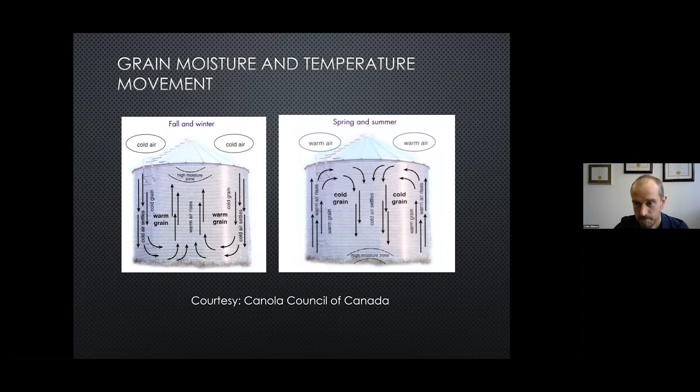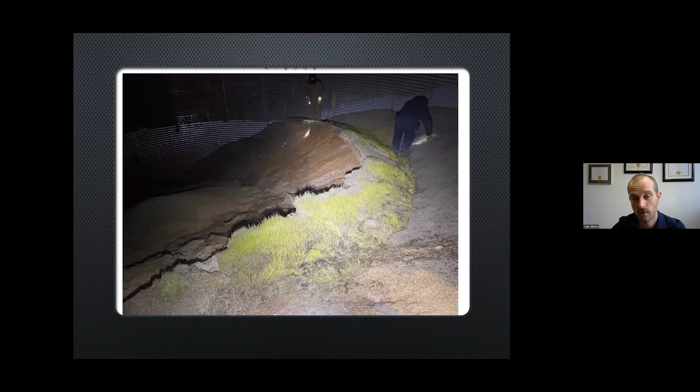The problem is that spoilage often starts in the core of the bin, not on the surface or the edge. So the earliest method for that is grain probes, where you essentially hammer in a big stick as deep as you can into the grain bin. Then there's a mechanism to open up a bunch of small chambers at different depths, and you pull it back out and look at the grain to see if anything's going on - if it's hot, test its moisture content, that kind of thing.

There's obvious problems - these don't scale very well. The largest grain bins are now 130 feet in diameter, so you just can't monitor that grain very well with probes. They don't scale, and they're very manual.

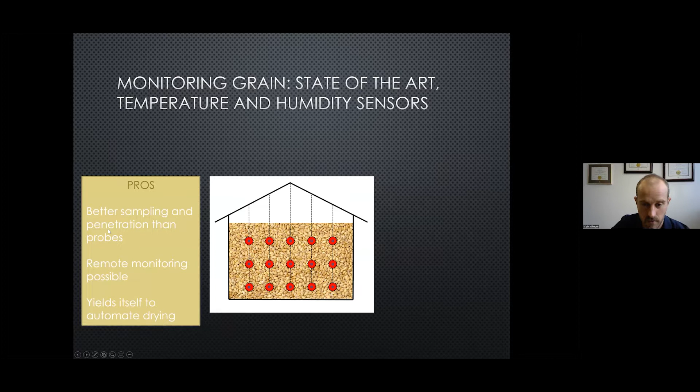But before grain bin imaging, this is kind of the current state of the art: you hang cables from the roof of the bin, and these cables have temperature, and sometimes temperature and humidity, sensors on them - little point sensors that just sense the local temperature like a thermometer would, or humidity like you would for the weather. These are much better than probe sampling or looking at the top, because you're actually getting into the grain pile where the problems do happen.

These are electronic, so everybody who sells these bins has a website so you can get the data off it. You can read it locally with a handheld device, or check it out on a website as well. You can also control your drying process a little better. Most bins, and all large bins, have fans that can push air through the grain, because otherwise you can't control the moisture content and temperature very well.

The problem with these current state-of-the-art sensors is that the temperature and humidity sensors are very local. Grain is an excellent thermal and humidity insulator, so you can have a problem. One of the salespeople I've worked with for many years said he was once in charge of a bin that literally lit on fire. There was a temperature sensor 4 feet away, and it wouldn't detect the fire because the insulation of that 4 feet of grain was good enough to make it read fine, but he could see smoke coming out of his bin. So that's the biggest problem, they're hyper local. Even though it's better than a probe or looking at the top of the bin, there are still large amounts of grain that just aren't monitored.

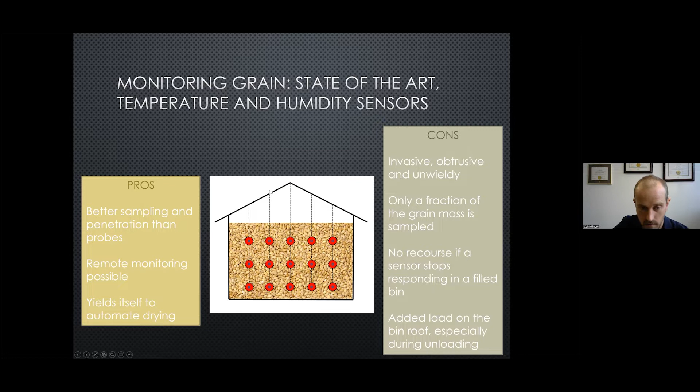Another large problem is that these cables hanging from the roof, when the grain empties, put immense forces on those cables, especially in larger bins. The grain bin companies we work with tell us that the majority of the steel in the roof of a grain bin is actually there to support these cables, not to support the roof and the snow load in the wintertime.

So the technology I'm going over today is electromagnetic imaging, or electromagnetic inversion. That's what the lab I work at at the University of Manitoba does. We have an antenna array, usually something like 24 antennas, in the grain bin. Each antenna transmits and receives in turn at a bunch of different frequencies, and we pick those frequencies, that's part of the art.

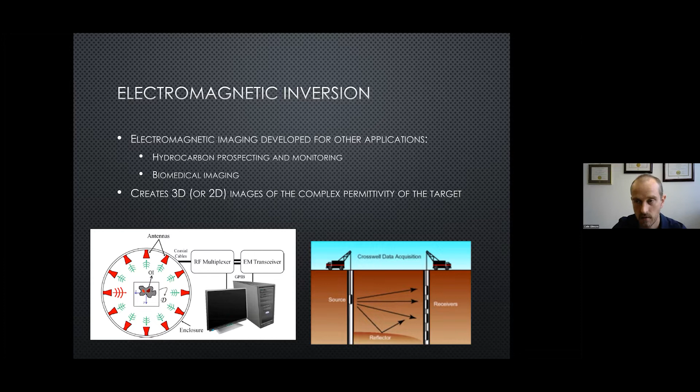You use the information of the scattered fields from some object you want to image, and you create an image of the electrical properties, which is the complex permittivity of that object. Many of the algorithms and processes we use were originally developed in the oil field industry. In the oil field, you're regularly trying to see things deep underground where something like X-ray imaging or traditional medical imaging technologies just won't cut it, they don't get enough signal through from your transmitters to your receivers. So you change the frequency of your electromagnetic radiation to get more signal through, and then you need a special kind of algorithm to make an image of what caused that scattering. That's what we do here in the electromagnetic imaging lab.

The key connection for doing this in a grain bin was provided by Dr. Paliwal at the Grain Storage Research Lab: for nearly a century, complex permittivity is how grain moisture content has been measured at a grain elevator or on a farm. Every farmer has a grain moisture meter, and every elevator has a well-calibrated grain moisture meter that they use to test the moisture content of the grain, because it's one of the factors in the price. So that's been going on electromagnetically for more than 100 years.

That parameter, the complex electric permittivity, for those of you who aren't electrical engineers or familiar with the term, or a geoscientist who's used complex permittivity before: the complex permittivity can be split into two parts. One is just the basic permittivity, which is related to the speed of light in the material, and the conductivity is just the loss of energy in the material. The example I always use: you have a paddle, you stick it into a clear body of water, if the paddle looks bent, that's because the speed of light changes from air to water. But if you stick that paddle into the Red River or the Assiniboine River, you're not going to see it, because the muddy water is absorbing the sunlight and turning it into heat inside that water, so you can't see it.

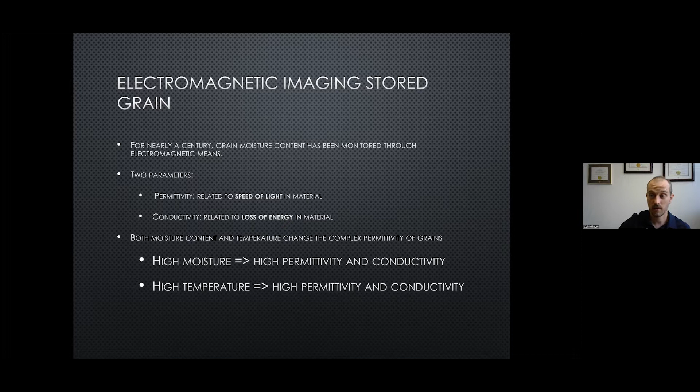What allows us to use this imaging technology to monitor grain is that we're lucky, it turns out that both high moisture and high temperature lead to high permittivity and high conductivity, and they both push the same way. Bad storage conditions are high moisture and high temperature. High moisture and high temperature cause the grain to sprout, which causes more moisture and temperature to rise, and there's that positive feedback cycle I talked about. Both of those push in the same direction. It would have been really bad for us if they pushed in opposite directions.

As the temperature went up, the permittivity went down, and as the moisture went up, the permittivity went up, that would have been very bad. We're fortunate that they push in the same direction. So the key thing is bad storage conditions and spoiling grain both cause high permittivity and conductivity. That's the key that allows this to work.

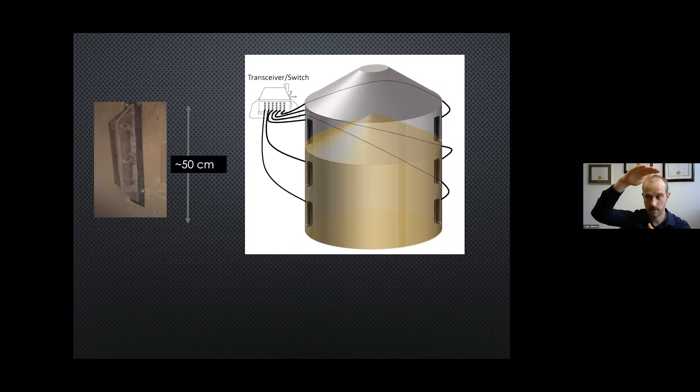Here is a schematic of what an imaging system looks like inside of a grain bin. On the left is a photograph of one of the antennas we use, mounted to the wall—some bolted, some magneted. We've tried different mounting methods depending on economic demand. The antennas are about towel rack size, roughly 50 centimeters tall, and stick out about 10 or 15 centimeters into the bin.

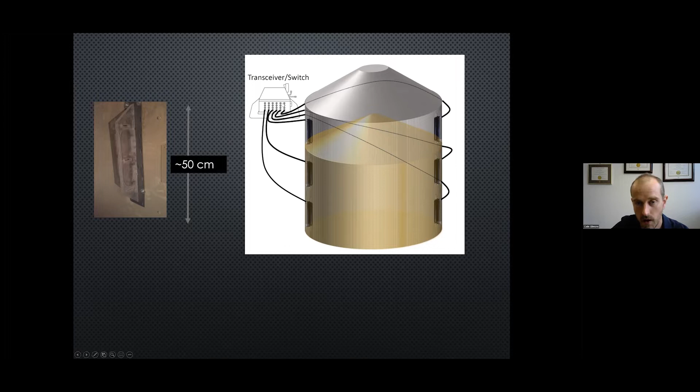Each antenna has to be cabled with an RF cable, similar to a cable TV coaxial cable, connecting each antenna to a switch with control software and a computer in the box—I'll show a picture of that shortly. That does the communications and has the RF radio that does the RF measurements to transmit from each antenna and receive from all of the other ones, and the RF switch to do all of that.

Here's a photograph of one of the early installs we did. This bin is about 30 feet, or 10 meters in diameter, roughly 33 feet. In this install, the goal we always have is to spread the antennas around the outside wall of the bin as much as possible. You don't want a dead zone—it's much better to get data from all possible angles, so we try to spread them out as best we can.

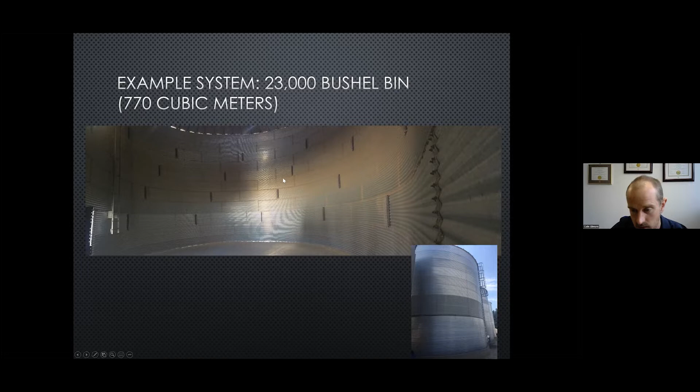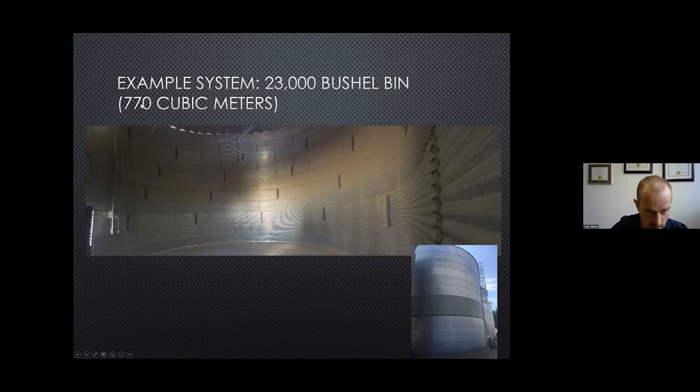This system was bolted, so you don't see the cabling on the inside of these antennas. All of the cabling comes on the outside of the bin and runs back to our transceiver system, which is stored bolted to the outside of the bin. Just to give an example of size, this bin is 10 meters in diameter and about 770 cubic meters in volume.

The power supply is kept in a separate enclosure that can be quite far away. There's multiple reasons for that, but one is just RF noise—you want to keep it away from large industrial fans and other equipment on a farm, since the power supply can be very noisy electromagnetically. So we keep it far away. This power supply box also has relays to turn fans on and off, so that a producer or farmer can sit at a computer and turn the fans on for all of their bins remotely over the network connection.

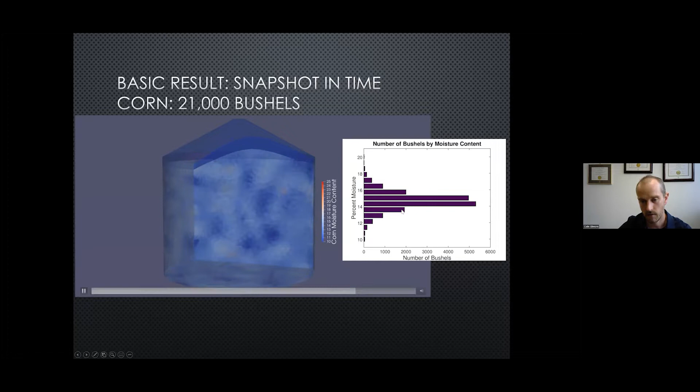Here's the basic result the system provides. We have a computer model of the bin—I'm showing a video of a 3D image, and these are slices of that 3D image. We can provide things like a histogram of the number of bushels by moisture content. This was a bin full of corn, and this is the estimate of the moisture content of each bushel inside. That's useful because grain is bought and sold by weight, and you have to keep moisture content low for safe storage, but as high as possible since you're getting paid for that weight. If you've got 15% moisture grain, you get more money than 13% grain, because you made 2% more by weight. So it's worth a lot of money to carefully control your moisture content, especially in a large bin.

Now, one of the biggest sales points for this system is that we can detect spoilage. The problem is that no industrial producer will ever let us spoil a bin of grain, for obvious reasons. So we've built many scaled systems where we can go in and spoil grain or add water and monitor what happens. This was one of the earlier ones—it's a barrel, about 240 liters of grain. We welded on a plenum false bottom floor so we could pump air through this barrel.

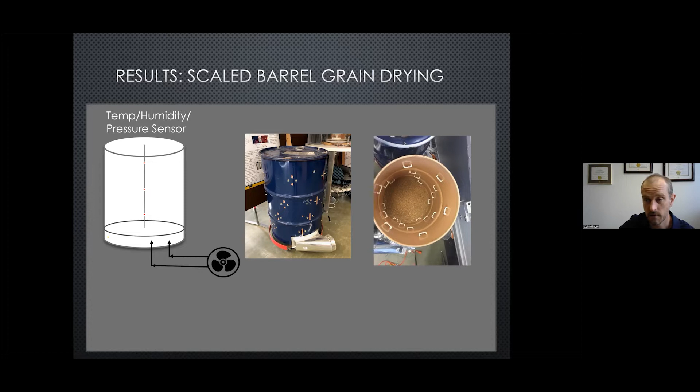To correlate our results, we used a second system: temperature and humidity sensors on this barrel. We made the grain really, really wet, then imaged it to see what would happen over 6 or 7 days as a fan dried it out. Here's a video of that result.

What we have here is the number of days of drying. With this three-dimensional image, we got better results if we averaged it by layer, and it was a much easier thing to understand. You can see as time goes on with this system, the grain slowly becomes more dry.

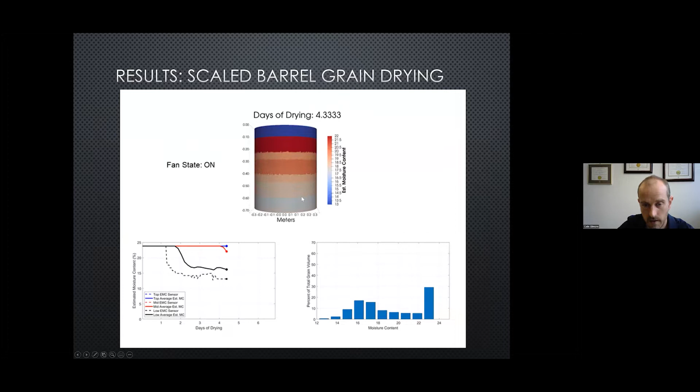It starts out above 22% moisture and ends at 13% moisture. That goes from grain that will spoil in a day or two, down to grain you could store in this bin for months on end without worry.

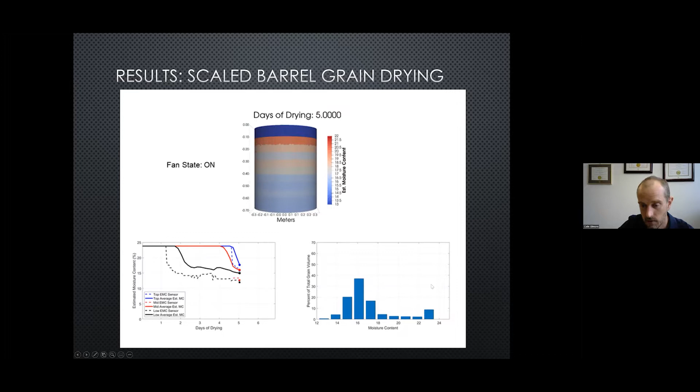We also have plots of how the EMC sensors compared with our imaging — there are differences there, but overall you can see how that works, and you can watch this histogram change over time with the moisture content. It starts out almost all of your grain volume at high moisture content, and by the end it's dry.

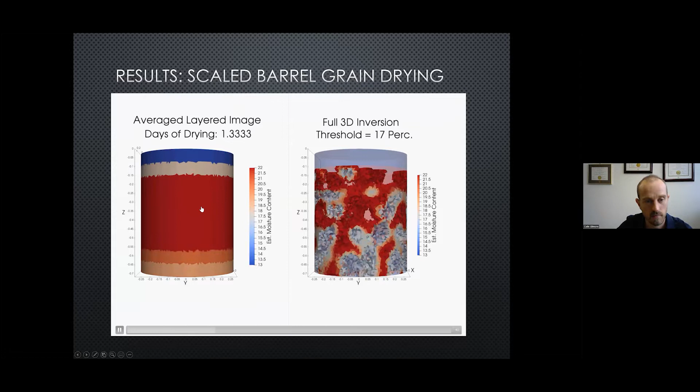Here's another little video showing this is the same image as on top of that last one, just to show that there's truly a three-dimensional image being produced, but we were averaging it by layer, because the three-dimensional image, especially in this test bin from the older times, has a lot of spatial variation in moisture content that's very hard to just look at and interpret.

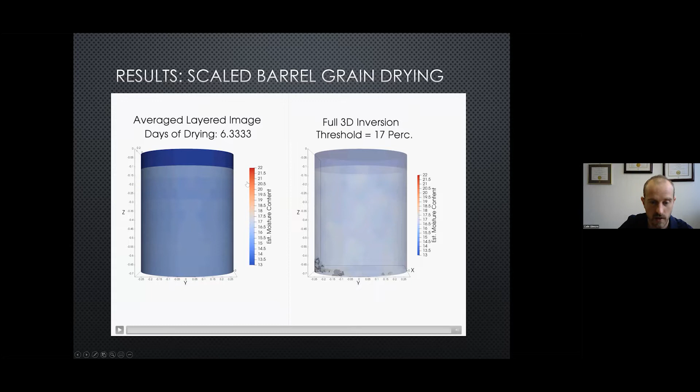So we have a three-dimensional image, but this is just a threshold view of it to show that it does exist and is there. It shows the same kind of result, but it's more interpretable if we just average it by layer.

Inside some larger bins, we were able to bury some hotspots. We couldn't spoil the whole bin or make the whole bin wet — that's very dangerous. So we went into this bin and physically buried bags of really wet grain to test whether we could detect a hotspot if it was indeed there. And of course, we can detect a hotspot.

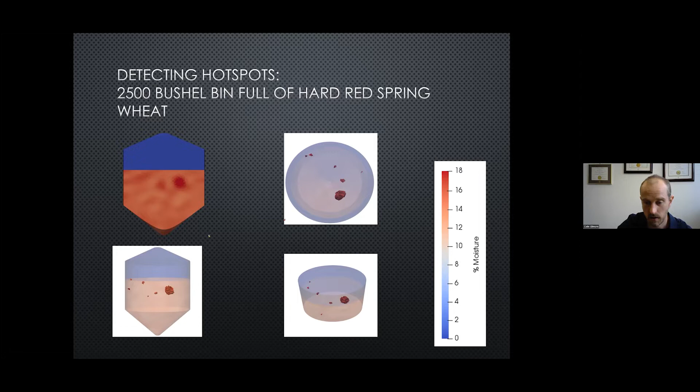So that's just what this one shows. This bin is about 15 feet in diameter.

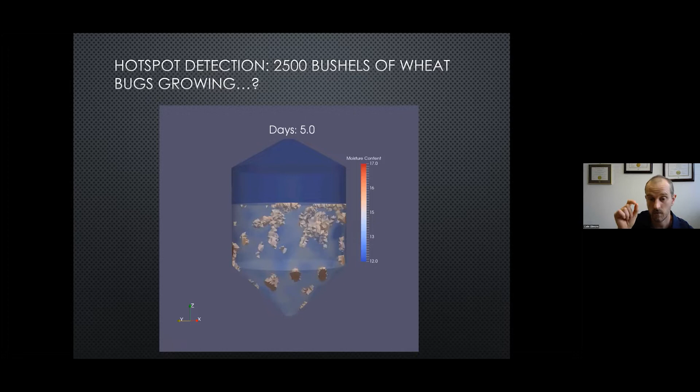Here's another result — once we buried that hotspot, we let the grain sit there for a while. This was in the summer. There was a very bad insect infestation in this bin, and we think that as the days went on in that little video, we were actually detecting the insect activity. But it was kind of an incidental infestation, so we weren't able to sample it in time.

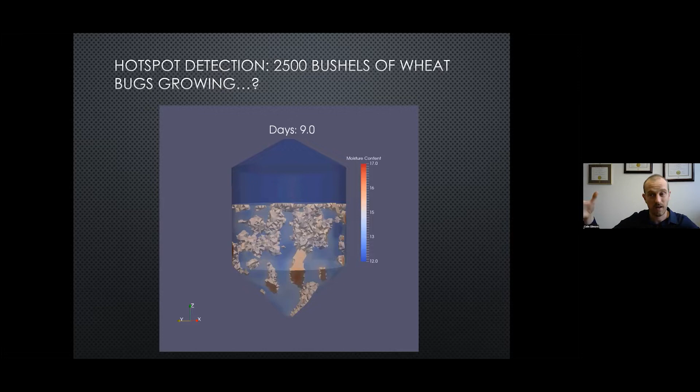We weren't going in there to take samples of the grain with a probe to prove we were detecting insects, but this one turned into a nightmare level of infestation. When we went in on day 9 and opened the lid, it was just a cloud of beetles flying out in your face. It was very ugly — the grain was stuck to the outside bin wall where the bugs had eaten it. It was a very bad infestation.

Some people might be more interested, rather than the actual grain which I've spent a lot of time talking about, in just the architecture of how the RF side and signal processing side works. We have boxes on top of the bins that communicate with each other over a cell phone network, and the inversion algorithm is done on cloud computing.

The inversion algorithm is done on cloud computing rather than locally because it's a very large computation — especially from a farming perspective, this is a very big computational problem. The results get displayed on a website that's constantly being refined and updated, which I can show some examples of in a minute.

Our inversion algorithm is what I specialize in. We have to build a computational model of the bin, which ends up being a mesh made of tetrahedral elements—usually about 200,000 of them. The size of each tetrahedral gets bigger in a bigger bin because you run out of computational resources. You can't simulate a large bin with the same tetrahedral size as a smaller barrel, because the computational problem becomes too large.

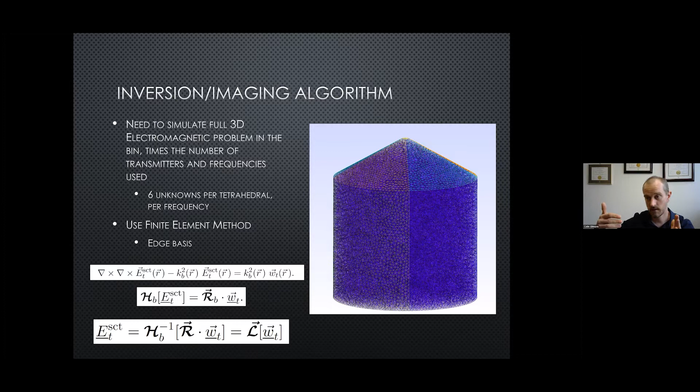I don't want to go into the details of the operator, but basically the core of it is we have a code that says, if you have this grain, tell me what the electromagnetic field should be. That's called a forward solver.

Now the inversion algorithm is the other part. What you need to do is say, well, I have a guess at what the grain is, and I have a measurement. You simulate what the electromagnetic fields at your antenna should be. There's always an error between your measurement and your simulation. Then an optimization algorithm tries to create an image of the permittivity that causes those electromagnetic fields, and you keep optimizing until your measurement and your simulation are close enough. That problem is called the inverse problem, and it's a very complicated set of rules and optimizations on how you do that.

The problem is that it takes a lot of computation because we have 24 antennas, and every antenna is another full three-dimensional electromagnetic simulation that you have to put in an optimization loop. So every time, you're calling your full three-dimensional solver 24 times on this structure. We tend to use Amazon Web Services instances because they were the most economical when we were first developing this—kind of a 36 CPU, 72 gigabyte of RAM processor. It's very expensive to put that dedicated on a producer's site because they don't need it all the time, so it's definitely worthwhile to use cloud computing services.

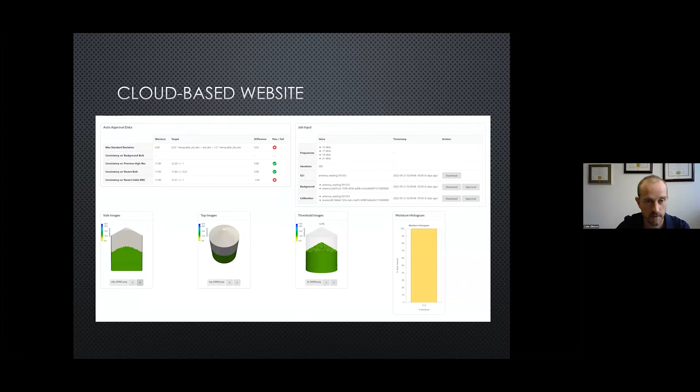So the net result is that we can have this thing in the field and generate a full 3D image of what's going on in the grain bin. It takes about 1 to 2 hours on these machines, and costs ballpark $5 per image in computational cost. The beauty of this architecture is it scales to thousands of bins because you just let Amazon deal with the scaling.

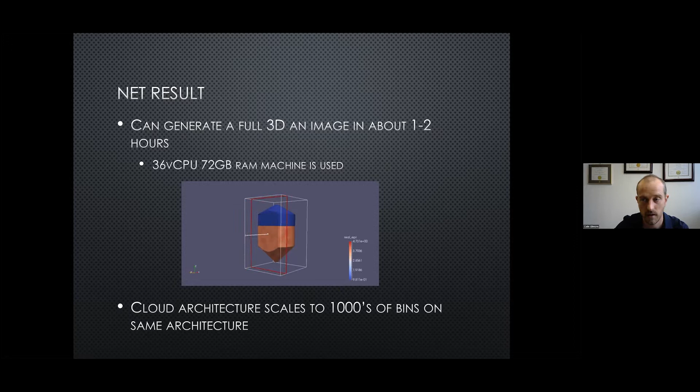Thank you very much. Thank you so much, Colin.

I think everyone's going to agree with me here, that is fascinating—I never knew grain bins could be so interesting. I love the videos you included in that presentation as a visual learner; that was really helpful for me to understand what was going on. And can I just say, I appreciate that we're close to Halloween, but that nightmare level infestation you showed is going to haunt me, Colin.

Were you there for that? Were you actually there when that happened? Yes, yeah, I had to clean the bin out. I had to climb in and scrape all the grain off the bin walls and shovel it away because it's bad when it spoils. So it's your Halloween nightmare then that you're going to relive. Okay, yeah, that was especially the video that accompanied that.

I can only imagine what that was like in real life when you actually went to open that bin up. That is insane. So I have to say this is super interesting, and you definitely can see why you were shortlisted for this award.

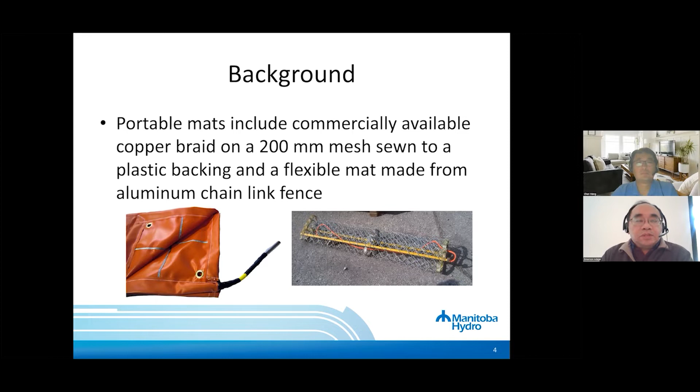Now this one on the right is a utility in-house design. It offers the same protection, but it has a lot of limitations. As you can see, there are two designs for ground mats: one is the fabric design, which is made of vinyl, and the other is non-fabric. The fabric design gives elevation to the foot, thus providing isolation as well as grounding. Now, the non-fabric design is usually made of metallic material, and it allows the foot to contact the surface material within a mesh.

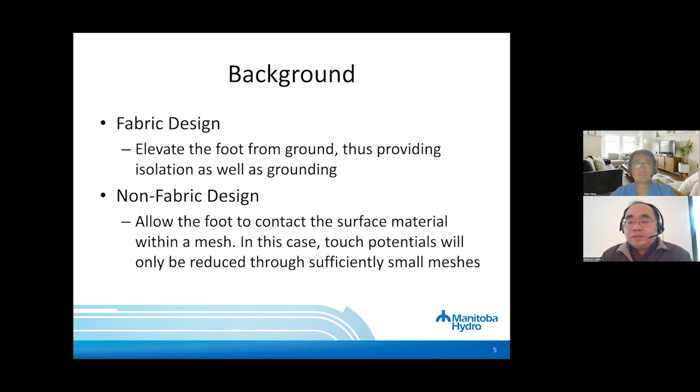Records have shown multiple near misses historically involving electrical workers doing their work, due to hazardous touch and step potentials. Now this has caught the attention of CEATI. So CEATI created an R&D project to address the deficiency and the need to update the test and requirements for portable ground mats in order to better protect our workers. So in order to check the effectiveness, they decided to put in a new test procedure, and also look at if there are new improvements or new materials we could use as gradient control mats.

So before the CEATI GLP 3708, there was already the ASTM F2715 standard. This standard outlines the test procedure for ground mats, but this is only for the fabric design, not including the non-fabric design. And this hasn't been updated since 2009. So there's really a need for updating these standards, and that's where the CEATI GLP Project 3708 came in. With members from other utilities and manufacturers, they formed a group and have come up with a new test method and test procedure.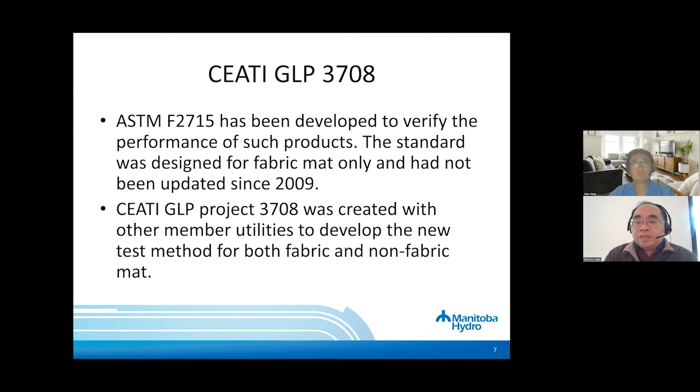Right now, I will turn the presentation to Chen to discuss the tests, the old method and the new test method. Chen, take it away.

Yes, hey thanks Emerson. So as Emerson mentioned, we've had a couple of near miss incidents in the past, not only from our utilities but from other North American utilities as well. So due to this ongoing safety concern, Manitoba Hydro, along with other utility members, initiated this CEATI project to look into this issue and evaluate what kind of new test methods we should develop to evaluate this type of design, in order to update the ASTM standard. So we started evaluating different test methodologies, and because the grounding mat has two streams, one is fabric and one is non-fabric, we designed individual tests to evaluate the different types of product.

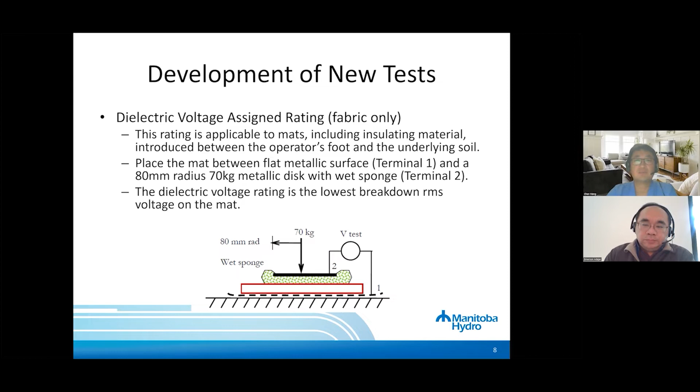So the first new test developed from this research is called a dielectric voltage test. This test is designed to confirm the electrical insulation performance of any non-metallic mat. The test procedure includes placing a flat metallic plate with a wet sponge on the ground mat, representing the worker's foot contacting the mat. Then we apply a voltage, and this voltage is slowly increased until the leakage, until the insulation actually starts to break down. This gave us the minimum breakdown RMS voltage on the dielectric mat. Next page, please.

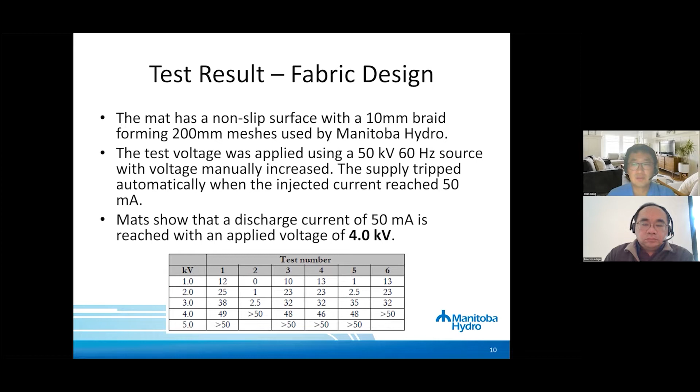But it's worth mentioning that the condition of the mat is very critical for dielectric testing. We found some previously used mats fail at less than 1 kilovolt due to wear, punctured holes, and those kinds of things. So it really depends on what condition the particular mat is in when you test it. Next page, please.

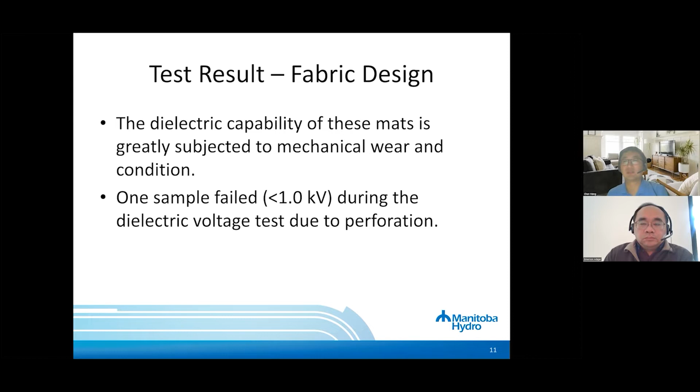So for the metallic mat, we tested one made of aluminum chain link fence with 30 millimeter mesh. The fault current rating is about 12 kiloamps, which is much less than the theoretical value of 23 kiloamps based on calculations. This reduction is mainly due to the weak connection between the copper braid wire and the aluminum mesh. The mesh may be okay, but the connection is already broken and it's arcing, so that's why it failed.

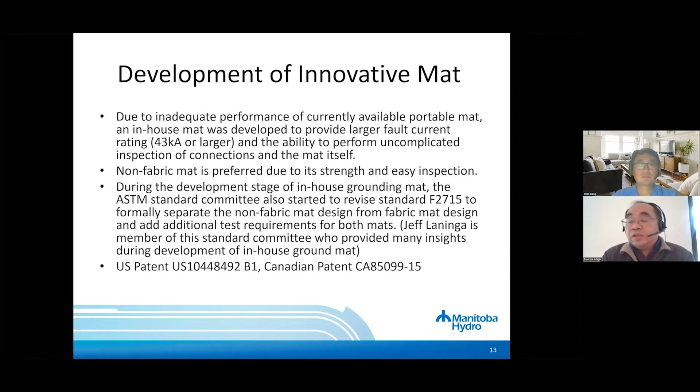So this is the portable ground mat that we designed. Actually, there are already two versions. The first version is the one on the left, and the second version is the one on the right.

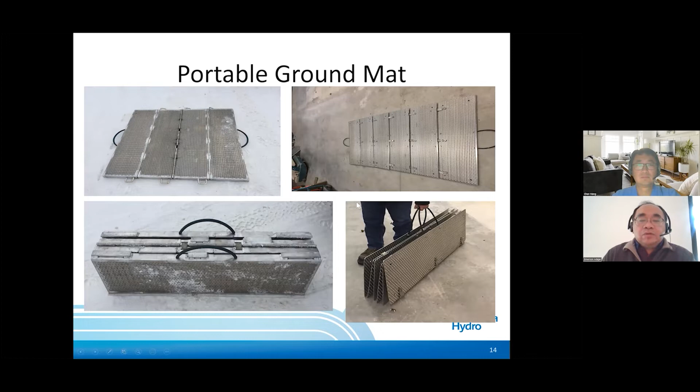The first version is like an attache case, made of aluminum cut into 4x4 or 2x4 pieces and welded into a frame assembly. It's really sturdy and offers a defined working area for our workers. The panels are attached with a hinge running from the bottom to the upper portion, so it will not buckle when workers step on it.

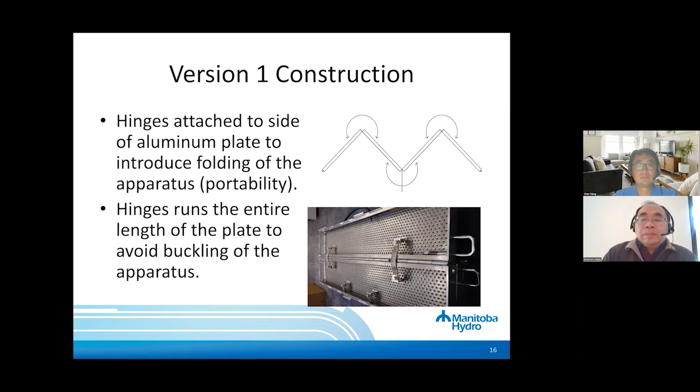As you can see here, this is how the portability comes in, because it can be folded like an attache case or a picnic table. It can be locked with a spring mechanism, and this locking mechanism can be used during working, whether it's spread out or not, so it will hug the ground more. It's made of perforated aluminum in order to limit slips and trip falls.

For the electrical bonding, we use 2 bondings per panel to make sure that all panels are in the same equipotential zone. They're all bolt-connected for easy inspection, so every time a worker starts their work, they can easily inspect it and remedy any loose connections.

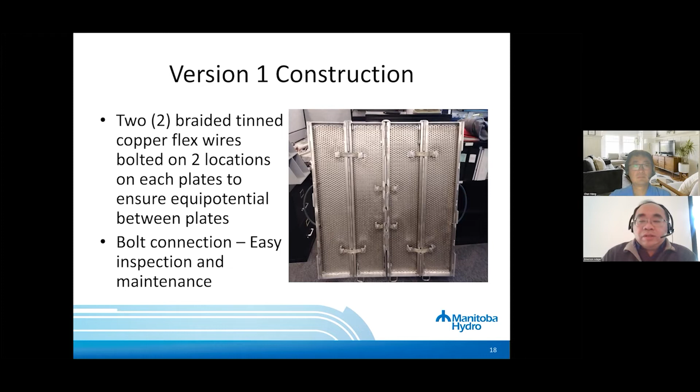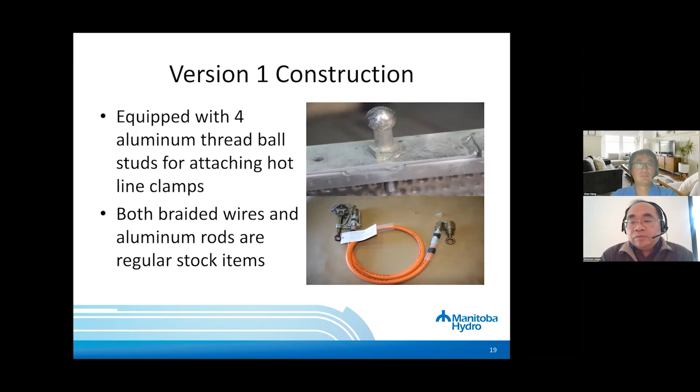To connect the bonding, the ground mats into the equipment, it is equipped with threaded ball studs, and we also use hotline clamps to have attachment or connection from the equipment to the grounding mat.

When we were designing this, we continuously involved our field workers, and with their help we designed version 2 of the grounding mat, which is much wider and a little bit lighter.

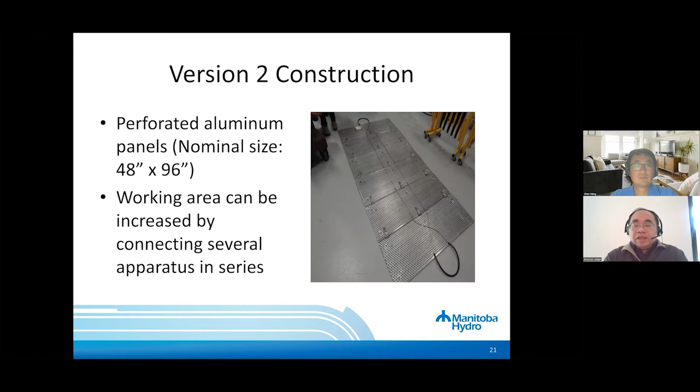This one is also made of perforated aluminum, and it can be extended by attaching panels in series, then folded again like an attache case. The braided wires act not just for bonding but also as a hinge between the two panels.

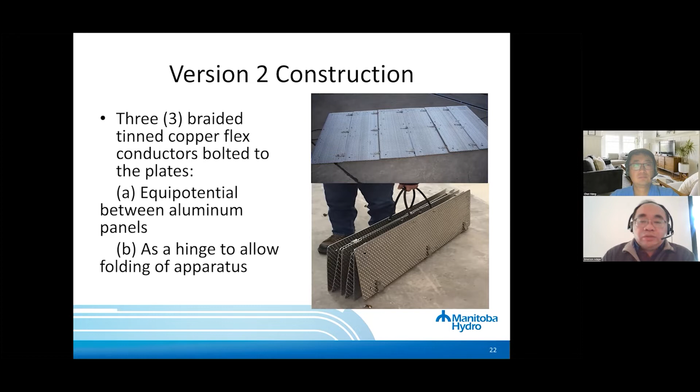It has a locking mechanism to secure it when bringing it to the remote work area, and we put in a steel wire just to be able to carry it. Again, there's a thread ball for attaching a hotline clamp, which is a must.

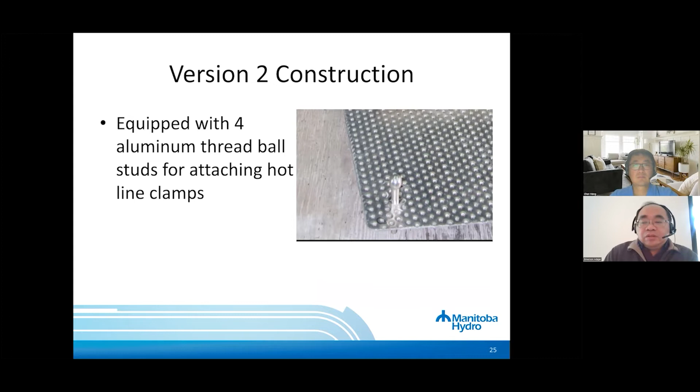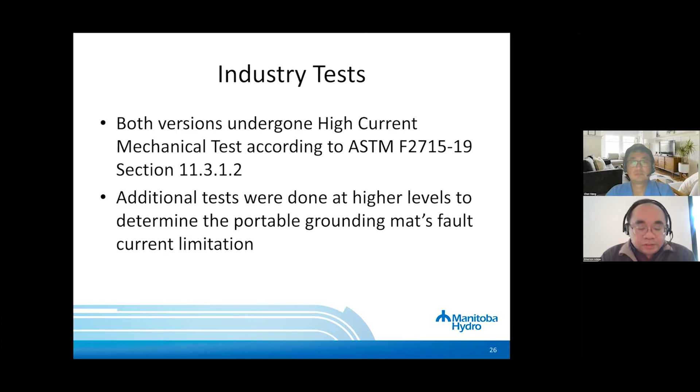Now, since we already have these new standards, ASTM F2715, we have it tested to see if our grounding mat can be safe enough for workers, and then offer them an equipotential safe zone. So the results of the tests will be presented to you by Chen.

Thanks, Emerson. I will talk about the test procedure and test results on our in-house design. The previous test procedure proposed by CRT has been adopted by ASTM standard F2715, and particularly for the metallic one, we adopted the fault current rating test. According to this standard, the minimum rating is 25 kiloamp RMS value under 15 cycles duration, and it has to meet the high asymmetrical peak depending on what kind of X over R ratio is based on your system.

In addition to the standard, we decided we want to test all the way to 43 kiloamp as minimum. The reason behind the 43 kiloamp is matching the rating of the standard fault-rated PPG cable used in our system, so we want to make sure the cable and the mat match each other and make a good pair. We also bumped all the way to 54 kiloamp, which is the max allowable testing current in the high voltage lab, so we reached the limit of the equipment. Both tests will be using an X over R ratio of 30.

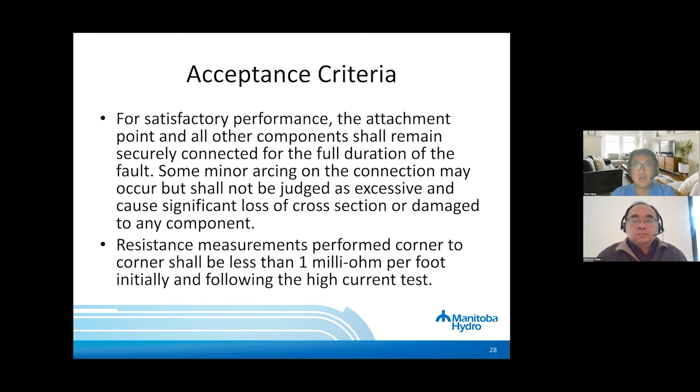The pass-fail criteria is that all the attachment points and any component shall remain securely connected during the test. We allow some minor arcing, but none of it should cause any significant damage on any component or loss of cross section. Resistance measurement shall be taken before and after the test, and it should always be less than 1 milliohm per foot.

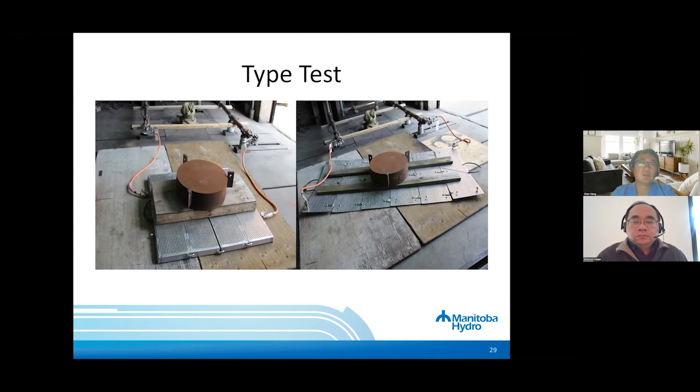This is showing a typical 43 kiloamp test on version 1. We connect between point A and point D. If you can play that.

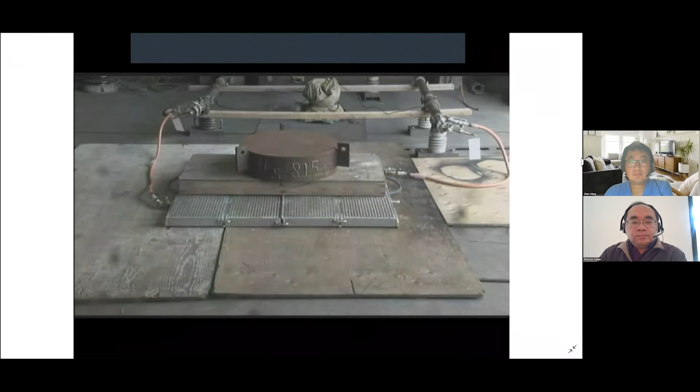As shown in this video, we tested all the way to 43 kiloamp, which is the upper limit of this fault-rated PPG cable. That's why the cable starts smoking, because it's reaching the limit. The cable shows some damage on the outside jacket, but the grounding mat is still intact - there's really no arcing, no smoking. We don't see any damage.

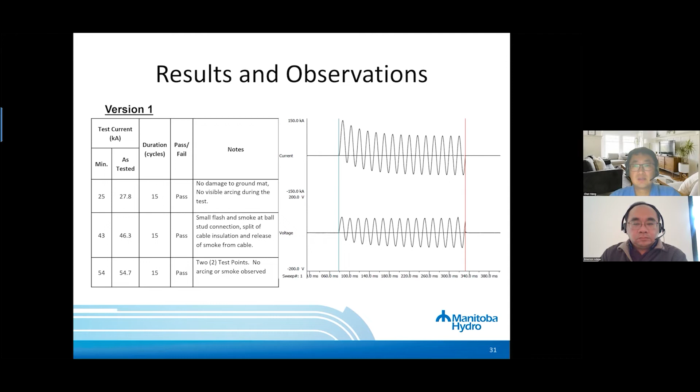This is the test result and observations on grounding mat version 1. We tested 3 currents: one is 25 kiloamp, that's the minimum requirement by the ASTM standard; we tested 43, that's our internal minimum requirement; and then 54, which is the limit of the testing equipment. Version 1 showed very good performance - it passed all 3 tests. There's no damage, minimal arcing we see, and we don't really see any smoking. The right hand side is showing the current profile.

This is showing some after-test observations on version 1 mat. We see some small pitting and small arcing marks between the surface of the grounding stud and the surface of the ground mat, but besides that, we don't really see any noticeable damage. We feel this one can even go higher than 54 kiloamp, but unfortunately we are not able to confirm that because of the limitation of the equipment.

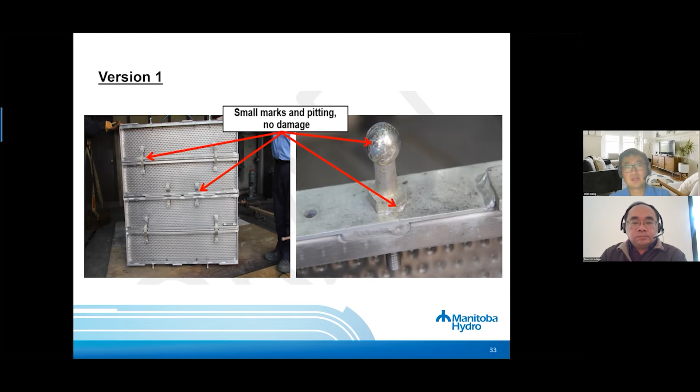That's all for our presentation, and we'll open it up for questions.

Thank you so much, Chen and Emerson, for your presentation. I think your grounding mat is such a great example of how innovation can really benefit everyday work life, especially considering its safety applications, because you're having a very direct impact on electrical workers' safety. This is not something you want to mess around with. So this is really fascinating to see the process you went through, and also all those very thorough tests, and it's amazing to see the results from those.

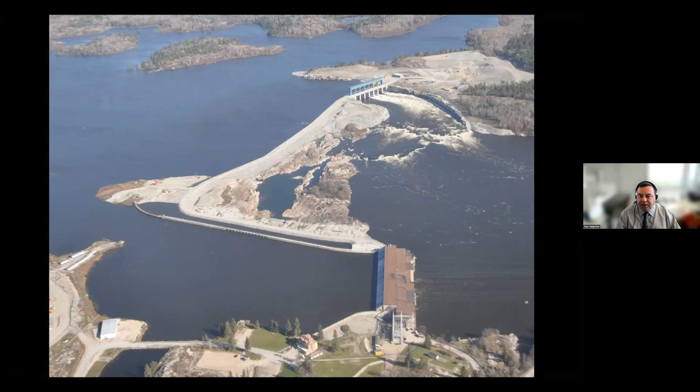Since I'm going to be talking about a unit at Pointe du Bois generating station today, I'll take a few minutes to describe this plant. The site straddles the Winnipeg River with a concrete dam. Near the bottom of the photo is the powerhouse, which contains the turbine and generator units, while near the top is the spillway. The Winnipeg River normally flows through the powerhouse to generate electricity. When there's more water than required to generate electricity, the excess flows through the spillway.

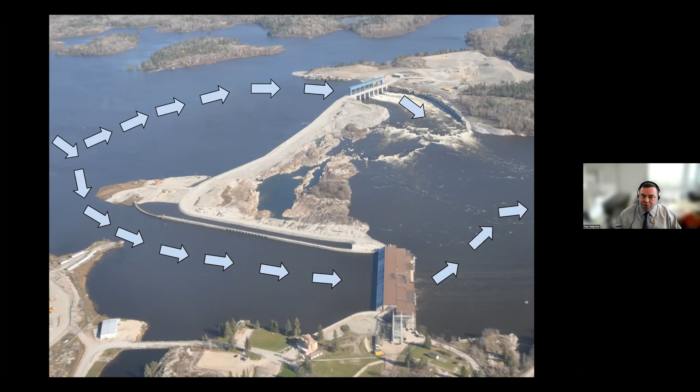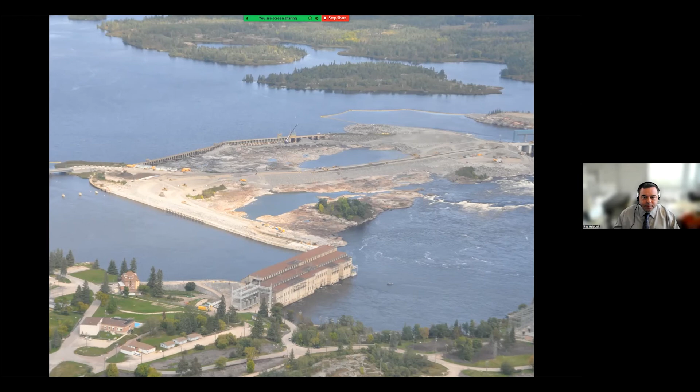So now let's have a closer look at what's going on inside the powerhouse at Pointe du Bois. I should mention that although the general principle of operation is the same at all of our hydroelectric generating stations, Pointe du Bois units look somewhat different given that they were designed at the turn of the 20th century. First, let's change our viewpoint a little bit. So here's the powerhouse. Now imagine if we could take a section view right through the powerhouse. This is what we would see inside.

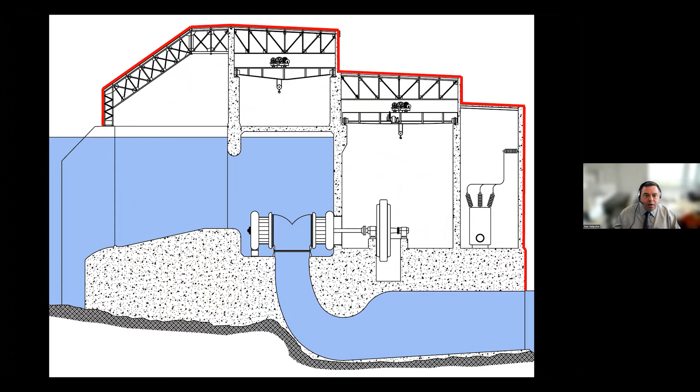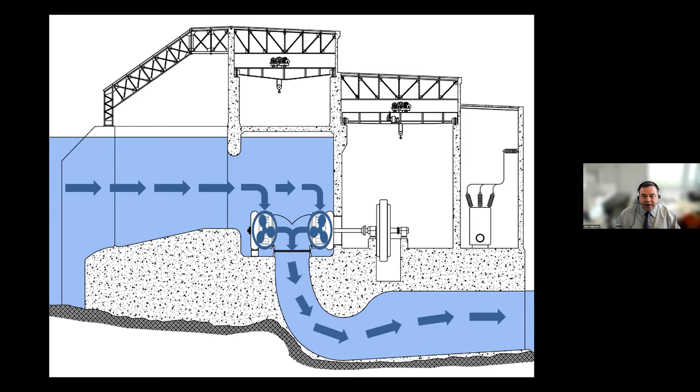So the inside of the powerhouse is separated into several areas. The areas shown in blue here represent the areas where the Winnipeg River flows through the powerhouse. Here is the turbine, which is located at the base of the turbine pit, and the generator located in the generator hall. When the unit is operating, water flows through the intake into the turbine and out through the draft tube. The spinning turbine is connected to the generator via a shaft, which then generates electricity.

Now that we've seen the general operating principle behind the Pointe-du-Bois powerhouse, let's take a closer look at the units inside.

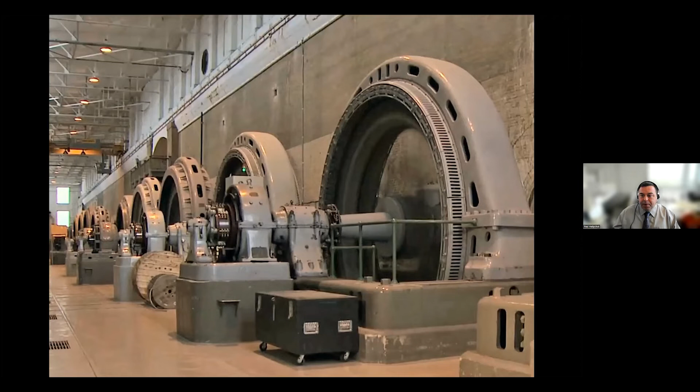There are 16 main units inside the powerhouse with a combined capacity of about 70 megawatts. There are also two special, smaller generating units referred to as house units. These special units provide the electricity to light and operate the equipment within the powerhouse.

Like all generating units, these machines require periodic overhauls to maintain their reliability.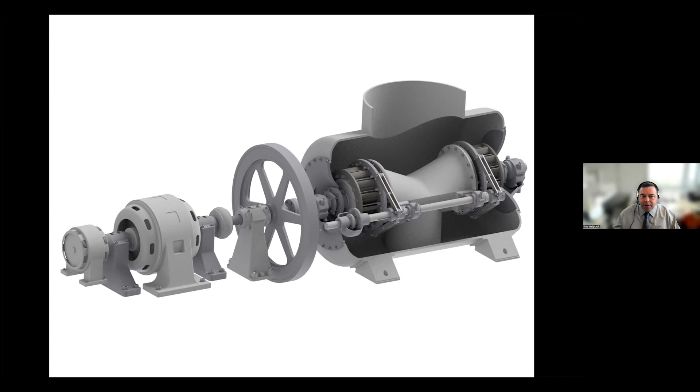These units include a regulating mechanism to control the flow of water through the machine and act as a throttle. These mechanisms include a turbine governor, various linkages to transmit the governor action to the turbine distributors, and sets of wicket gates arranged in circles around the water wheels, which must all act in unison to throttle the water flow through the machine and regulate the speed or output.

As I said earlier, as these items wear over time, the stability of the governor control is reduced and the components must be renewed.

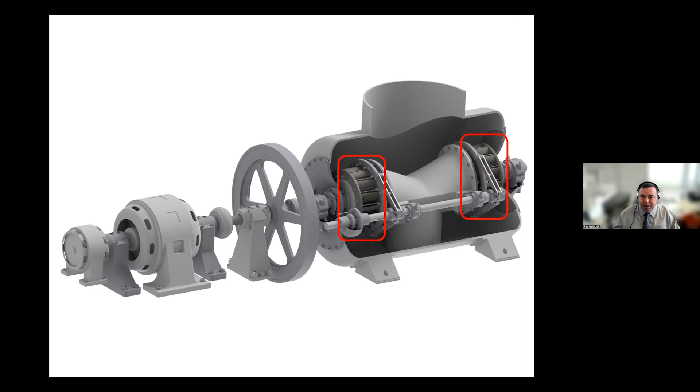Here you can see a little video of how all the components must work together to throttle the flow of water through the turbine.

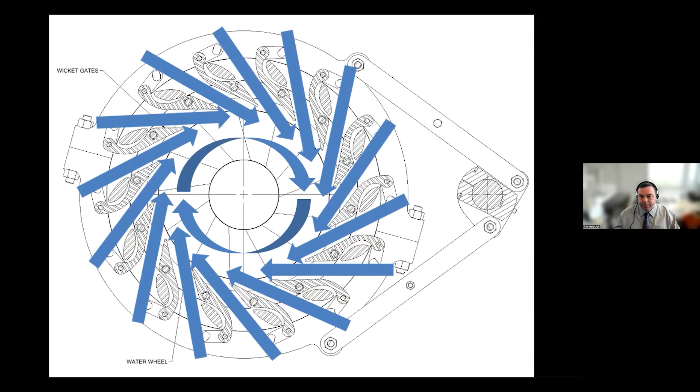Traditionally, mechanical unit overhauls are largely focused on piecemeal refurbishment of the wicket gate regulating mechanism components. On the main units, due to their large physical size and concrete embedded components, the removal of the complete distributor and replacement of those components is usually not economically attractive or practical.

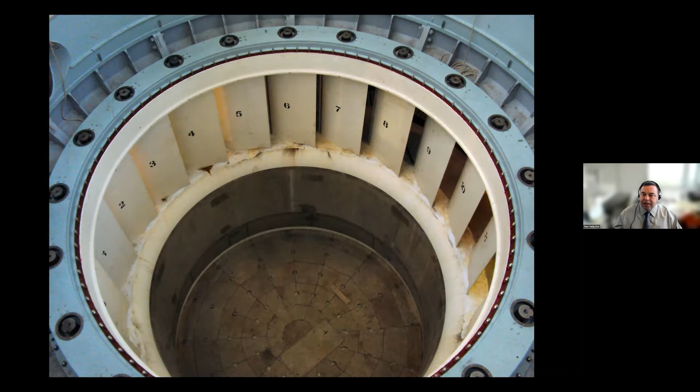The complete distributor tends to be so large that assembling it in a remote shop and shipping it to site is simply not practical. The main unit distributors at Kelsey are over 30 feet in diameter, as we can see in this picture.

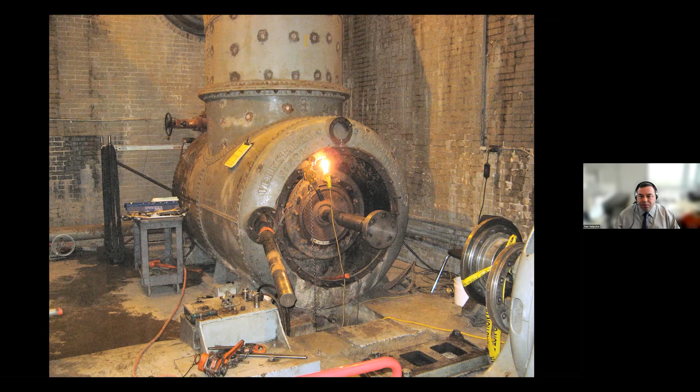In the past, mechanism components in the smaller house units have typically been refurbished following the same piecemeal procedures used on the larger main units, with the work being done mostly by our site staff.

However, there are a few key differences between those big main unit turbines and the house units, particularly those at Pointe-du-Bois. First, the components are relatively small, so that the cost difference between refurbishing the existing parts and completely replacing them is typically small as well.

And in some cases, replacement can actually be cheaper than refurbishment. Second, these components are 110 years old, and there is significant risk of finding unforeseen issues with the existing parts that could add cost and delay to the refurbishment, or may even be found to be beyond repair.

And finally, our site resources are no longer adequate to perform the refurbishment work on these units, while also keeping up with the maintenance on the rest of the plant.

While unexpected scope due to poor condition is not a critical issue when our site staff were refurbishing components, unknown condition makes it almost impossible for a contractor to bid a fixed price for the work.

To overcome these problems, I developed a novel approach to reverse engineer many of the existing components and replace them with new ones. This reduced the risk of scope creep and helped the contractors to bid a fixed price confidently without significantly increasing the cost of the work.

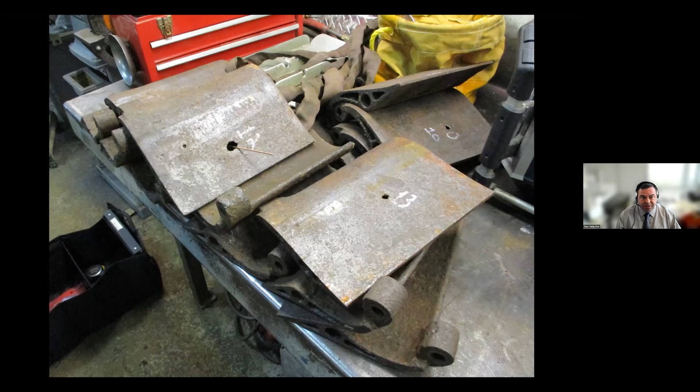The wicket gates have an extremely complex shape, and we had no original manufacturer's drawings of these parts to work from.

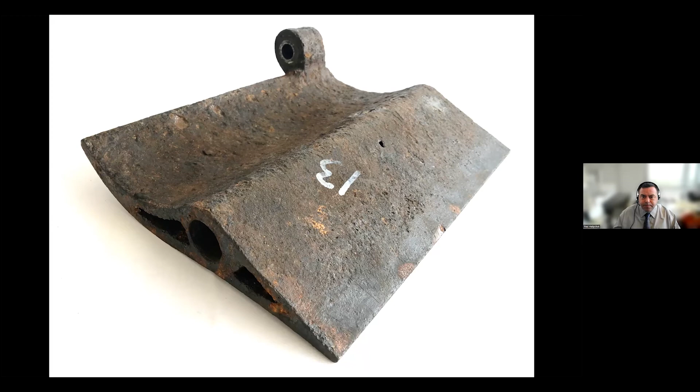By conducting surveys with a coordinate measuring machine on several wicket gates, I was able to produce a sort of histogram of the as-found gate shapes.

Due to the rough cast nature and age of the gates, it was not surprising that they were found to be not all identical.

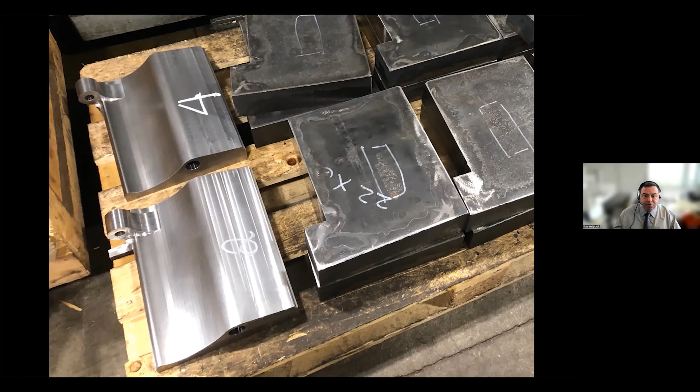Using this average shape to create a 3D model, a new standardized profile was created for the replacement wicket gates. Here you can see some steel plate blanks and a partially CNC machined replacement wicket gate set, and here we have a completed replacement wicket gate ready for installation.

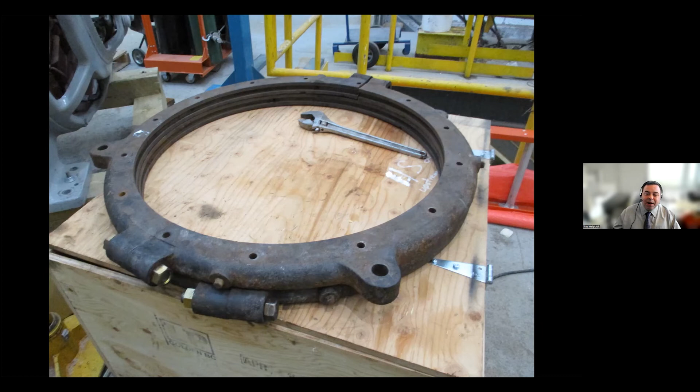Another example of risk reduction through component replacement was the turbine operating rings shown here. Each of the 14 holes in the ring must be evenly spaced for the mechanism to work smoothly. However, two of the holes were positioned very close to the split joints in the original parts. If during refurbishment the position of these holes needed to be shifted or enlarged, the repair would have become very complex and also very costly.

Instead, a new design was created that relocated these critical holes further from the joints, eliminating the risk of extra rework on the existing components.

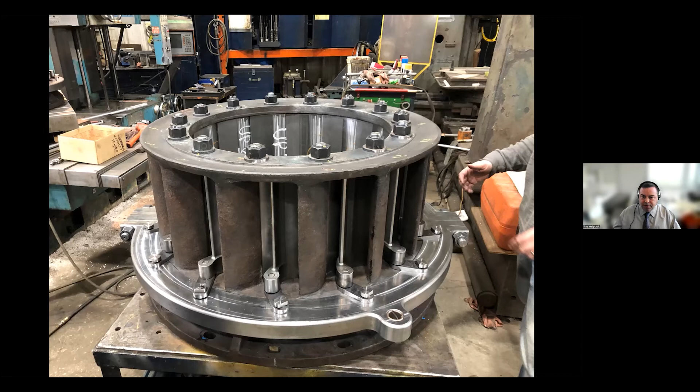As I mentioned earlier, aside from replacing rather than refurbishing many of the regulating mechanism components, another departure from past experience was the complete assembly of the mechanism in the shop rather than at site. The benefits of this include a more controlled work environment, ease and speed of modifications should issues be encountered during assembly, and reduced site work effort, this being especially important due to the recent deficit in our site staffing.

Although the turbine regulating mechanism is normally actuated by a hydraulic cylinder, we can see here that after a complete refurbishment, it can actually be moved simply by hand. This turned out really well.

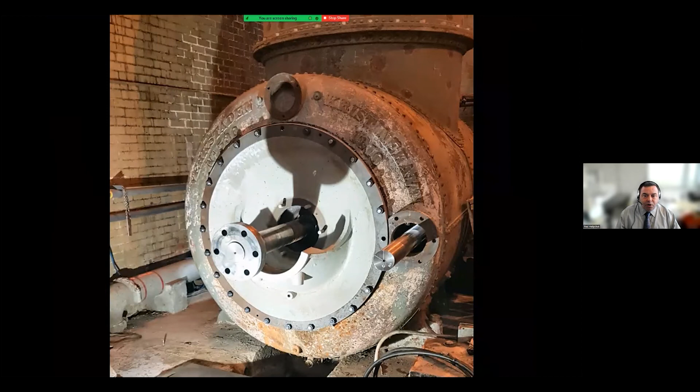After the completed regulating mechanism assemblies were returned to site, they were quickly installed and the unit successfully commissioned and returned to service.

And that's it for my presentation. So if anyone has any questions, I'll be happy to answer those now.

Wonderful, thank you so much, Paul. And you know what I love? Your presentation was so informative, but especially about how innovation can help processes. Previous processes are out of date, they're not working so well anymore for various reasons, and I love how you explored why they weren't working and how your innovation really helped solve those issues. Really interesting, and again, great pictures and great videos. I'm really loving all the visuals in today's presentation. So thank you so much. So again, everyone that's watching, if you have any questions, it's Paul's turn in the hot seat now, so pop those questions into the chat and I will start asking those.

So what I want to know, Paul, is it all sounds great and it all sounds wonderful, but you got to dish the dirt. Tell us, were there any unforeseen difficulties that you found with this new approach? Because there's got to be some, right?

Yeah, certainly. One of the issues we had, you saw in some of the photographs when we were machining those wicket gates. We started out with a fairly large billet plate of steel, and the bore through those wicket gates that they pivot about has a concentricity tolerance that's very tight. What we found was that because they started out by machining those bores, since they are a reference point for flipping the piece over to machine the other side, they would machine one side, and by removing that material, the plate actually relaxed a little bit. I guess there was some residual stresses from the rolling of the plate. And then when they flipped it over and tried to install the shaft, the axle that goes through, they couldn't get it to go in, didn't fit.